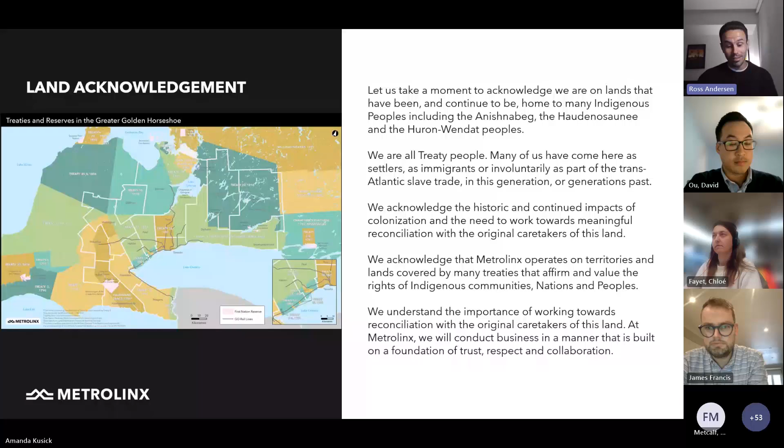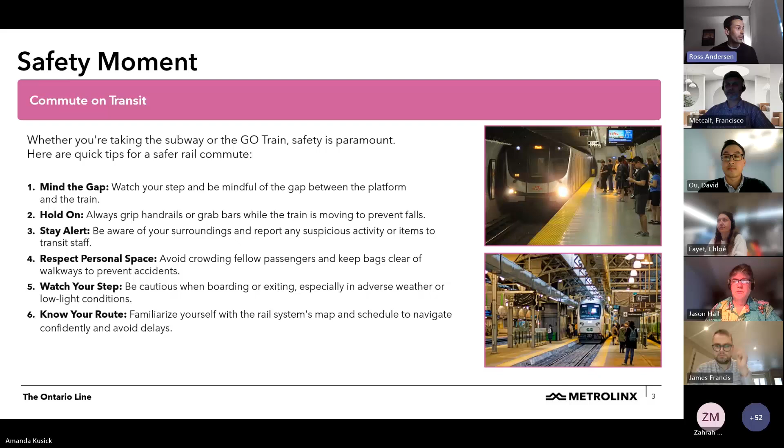Next slide, please. At Metrolinx, we like to give a safety moment ahead of our meetings, and today's safety moment is about transit safety. So if you're using transit, whether it's subway, streetcar, GO Rail or Via, just mind the gap and watch your step. Hold on and try to stay alert. Respect other people's space and know your route. Next slide, please.

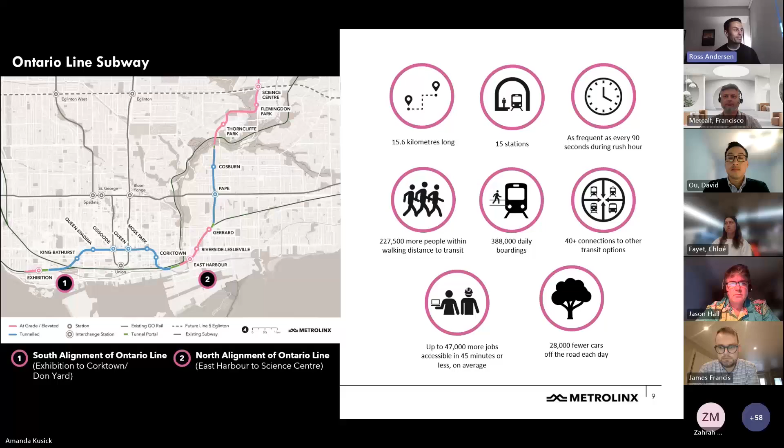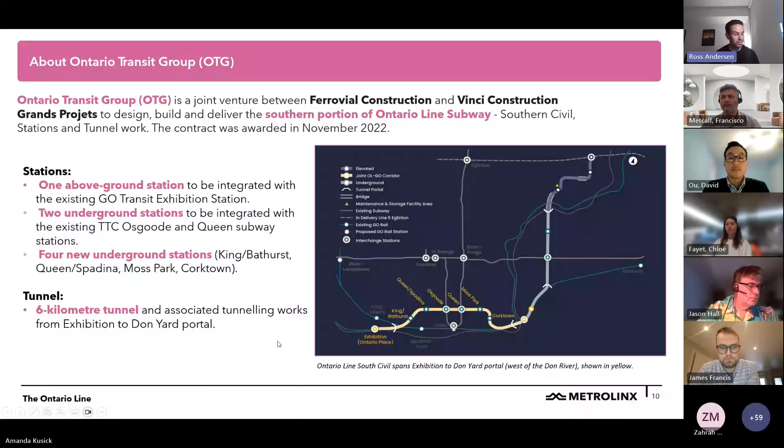So the Ontario Line is being delivered by several different contracts, and today we'll introduce you to the Ontario Transit Group. The Ontario Transit Group is delivering the south segment of the Ontario Line project. That is the tunnels and the stations. So as you can see here in the yellow highlighted portion, that will be what the Ontario Transit Group, otherwise known as OTG, will deliver. Two of those stations are very important interchange stations, which I just mentioned. And finally, they'll be building the tunnel as well. With that said, I'll hand it over to my colleagues at OTG and we'll go to the next slide. And David, perhaps I'll let you take the lead on this.

Corktown Station 2024 construction look-ahead schedule. So below on this list here are the major activities that will happen this year. So archaeological investigations. Archaeological work is complete on the north site. The south site is expected to be complete mid-spring 2024. The site hoarding installation is ongoing. The purpose is to define the long-term construction zone during the tunnel and station works. It will assist with public safety, noise mitigation, and site protection.

Piling operations are expected to start this spring and last throughout the summer. Once complete, excavation activities inside the shaft will start, and excavations are expected to reach a depth of approximately 30 meters below street level to reach the bottom of the station and tunnel. Next slide, please.

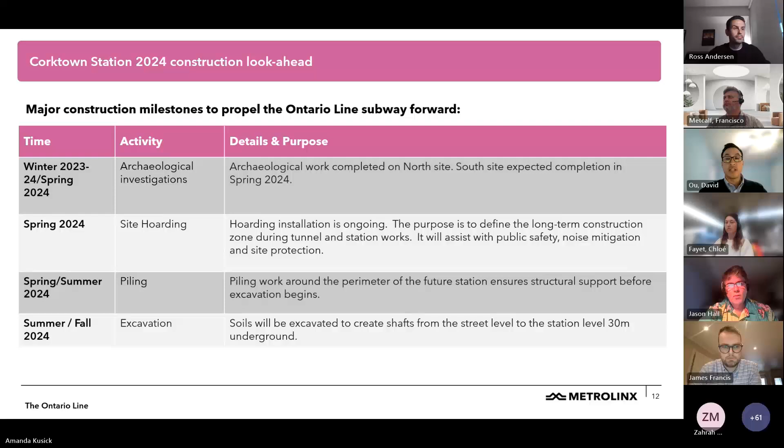This is a photo of our north site. Along the perimeter, you can see plywood, concrete blocks, and scaffolding. This serves as our hoarding system and separates the public from our construction work zone. It also acts as a noise and vibration barrier. Inside the site, you can see an excavator working. So what we're doing here is removing loose, disturbed material from the archaeological investigations, stockpiling it, and hauling it off site. After, we are replacing it with compacted granular fill; this will be the strong, stable foundation for the drill rigs to work on.

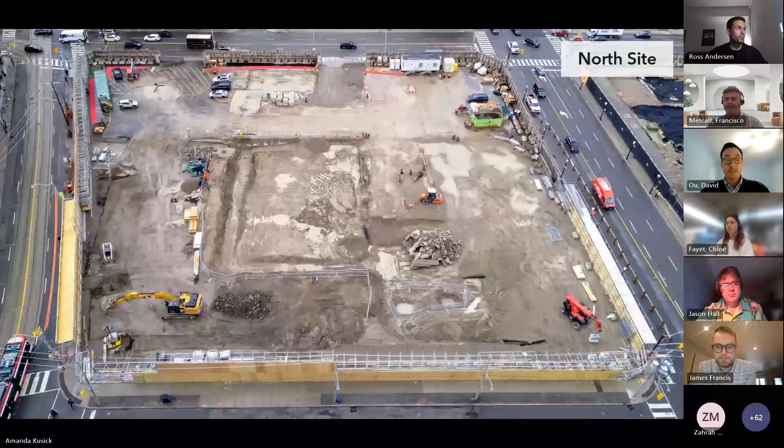Can you go back? So once the hoarding and site grading and preparation works are complete, we will then mobilize our drilling equipment to start the piling operation. Next slide. Focus on pile drilling.

How does piling work? Piling is a foundational technique used to construct underground structural support systems. Pile walls will be installed around the perimeter of the future station's footprint. It will ensure stability and support for the surrounding infrastructure and buildings during the construction of the station. A pile wall consists of overlapping piles to form an underground, watertight retaining wall. This retaining wall will go across the whole entire footprint of the station, and this allows us to excavate from street level all the way down to the bottom of the station safely while not disturbing surrounding infrastructure and buildings.

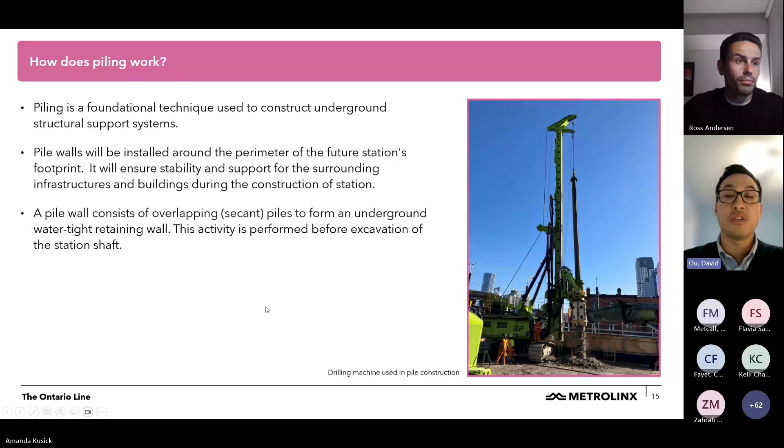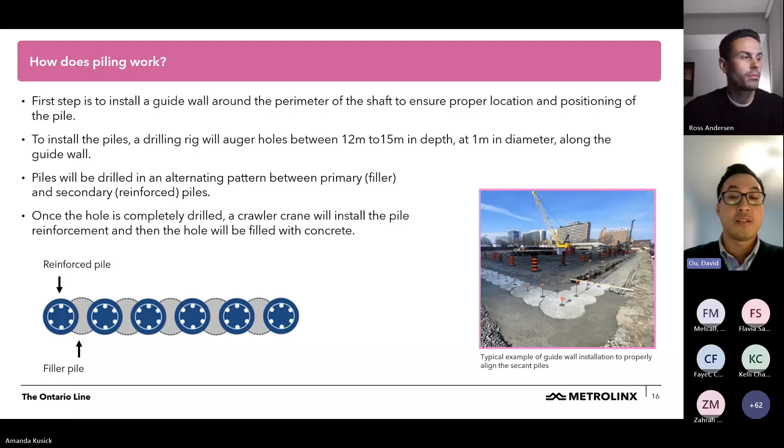of the pile. So to install the piles, the drill rig will auger holes 12 to 15 meters in depth to reach the bedrock. Once the holes are drilled, the hole is filled with concrete, and there are two main types of piles that we use. So the first type of pile is the primary pile in the photo below. That is just the hole filled with solid concrete. And then we have the secondary pile, which is reinforced. So these piles will be drilled in an alternating pattern between primary and secondary. Next slide.

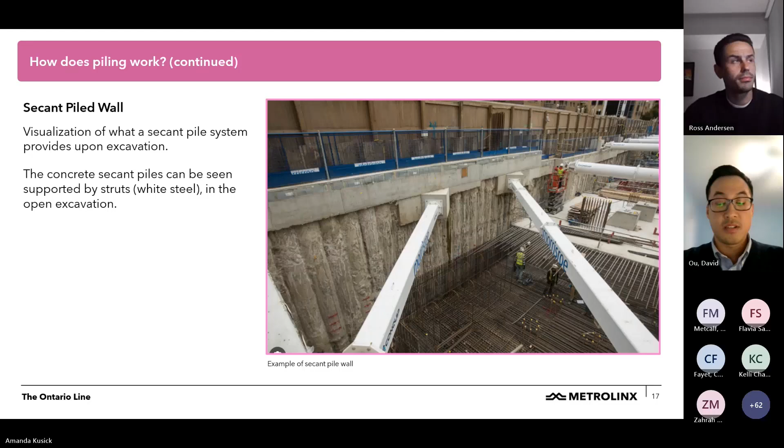So after all the piles are drilled throughout the site, we end up with a wall that looks like this. This is called a secant pile wall. So this temporary support wall allows us to safely excavate to the bottom of our station and tunnel, and allows us to build our concrete permanent structure from the ground back up. Next slide.

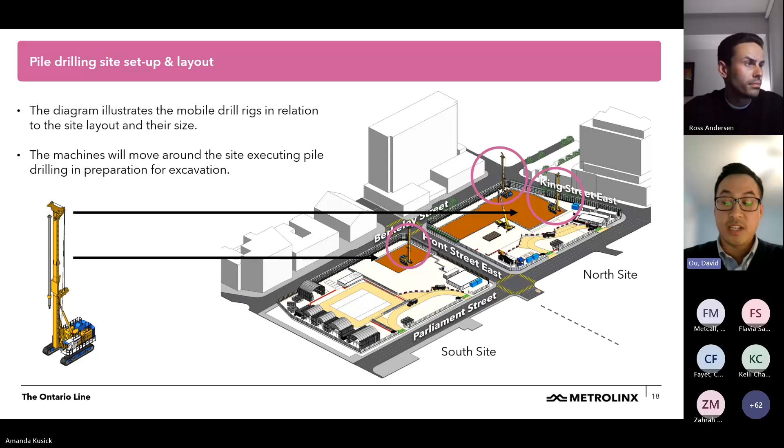So this diagram illustrates our drilling site, setup, and layout. So the piling operations will start on the north shaft first. Once complete, the drill rigs will be moved to the south, and then piling will start on the south.

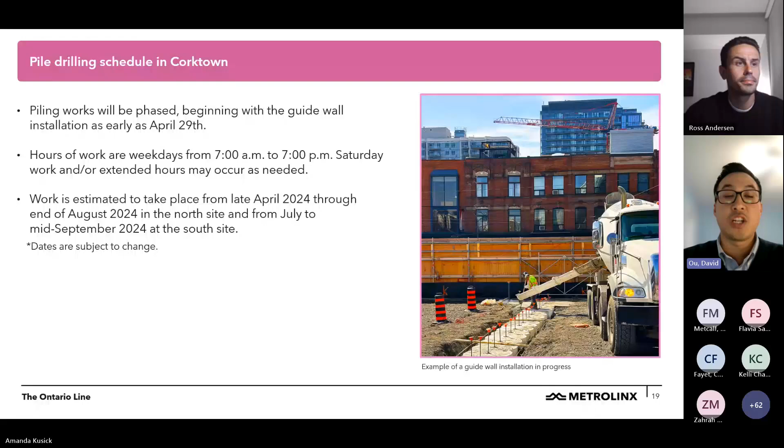So the piling drilling schedule in Corktown. Piling works will be phased, beginning with the guide wall installation as early as April 29th. Hours of work are weekdays from 7 a.m. to 7 p.m. Saturday work or extended hours may be required if necessary. The work is estimated to take place from late April 2024 throughout the summer into August in the north site. And for the south site, expected to start July and last throughout to mid-September.

I'm going to hand it over to my colleague, Chloe. She'll be talking about the impacts of the drilling and how we minimize all the impacts to the public and surrounding neighborhoods. Thank you. So during the execution of the piling activities, the community is to expect some noise from the equipment drilling the piles, loading excavated material, delivering material such as steel beams, and delivering concrete. So to be a little bit more precise, the equipment that will be used during this operation includes drilling rigs, cranes, excavators, concrete pumps, and also concrete trucks.

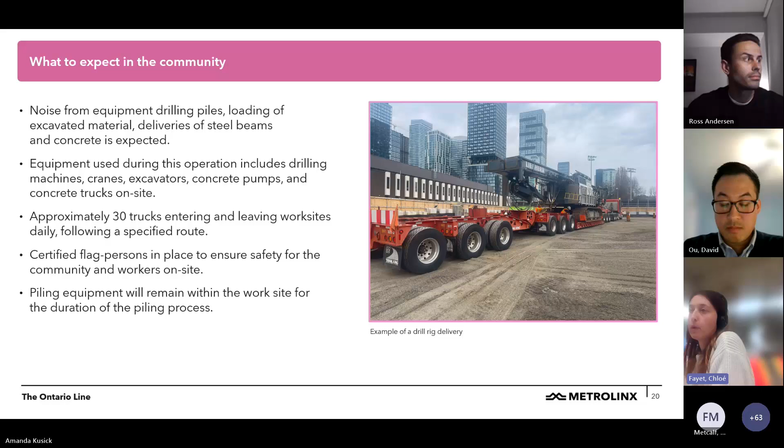So we are expecting approximately 30 trucks, more or less, entering and leaving the work sites on a daily basis, and those trucks will have to follow specified routes. Also, we will have certified flag persons in place to ensure the safety for the community and the workers on site. Finally, the piling equipment will remain within the work site for the duration of the piling process. So to the right, you can see an example of a drill rig being delivered on site on a truck. Next slide, please.

So now moving on to how we will reduce the impact to the community. So first of all, the trucking haul routes. So as I mentioned just before, the trucks have to follow specified routes. So coming from the east, the trucks will be coming from the Don Valley Parkway to Richmond Street, and then they will enter from Parliament Street and turn right into the site. The trucks will have a flag person to assist them to come on into the site.

Then for the trucks coming from the west, they will be coming from the Gardiner Expressway. Then they will go on Sherbourne Street and then turn on King Street and then turn again on Parliament Street to go inside the site with a right turn. Again, a flag person will be here to assist. The OTG delivery trucks are contractually instructed not to arrive on site before 7 a.m. to avoid any noise. So this was for the north part of the construction site. Regarding the south side, the routes are still being determined in collaboration with the City of Toronto. So this will be announced at a later date.

Now, regarding the pedestrian and traffic impacts. So all the sidewalks will remain open. The pedestrians will be able to continue to use Parliament Street. There will be flag persons to assist with the passage when the trucks are approaching the entrance and the exit points.

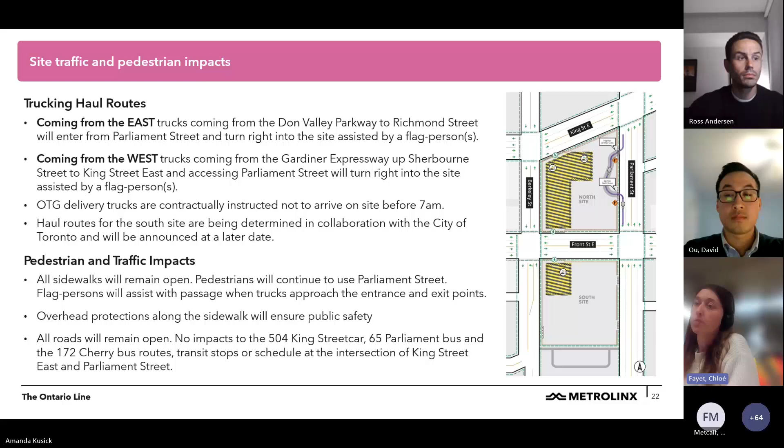Also, there are overhead protections that have been installed along the sidewalk that will ensure the safety of the public. And then finally, all the roads will remain open. So there will be no impact to the 504 King Streetcar, neither to the 65 Parliament bus or the 172 Cherry bus routes. So no impact on the transit stops or the schedule at the intersection of King Street East and Parliament Street. Next slide, please.

So to reduce the impacts to the residents and businesses in the area, mitigation will be in place. The daytime work hours for the current phase of work are 7 a.m. to 7 p.m. We have been installing 5-meter high noise wall along King Street East, Berkeley Street, and Front Street to help reduce the noise. We will use auger cleaner, which is a piece of equipment that we add to the drill rig in order to reduce the noise level when cleaning the rig. Also, by using continuous loop truck routes, we will be reducing the need for the truck to reverse and consequently to use their backup alarms, so less noise.

The air quality will be monitored to track dust, debris and vehicle emissions to ensure that the construction activities don't impact the quality of the environment. We have also dust control measures and street sweepers and wheel cleaning as needed to ensure soil and sediments are kept off the city streets and the sidewalks. So on the right on your screen, you can see an example of the 5-meter high noise wall that has been installed on King Street, and then below a picture of the auger cleaner, which is the yellow item on the picture. Next slide, please.

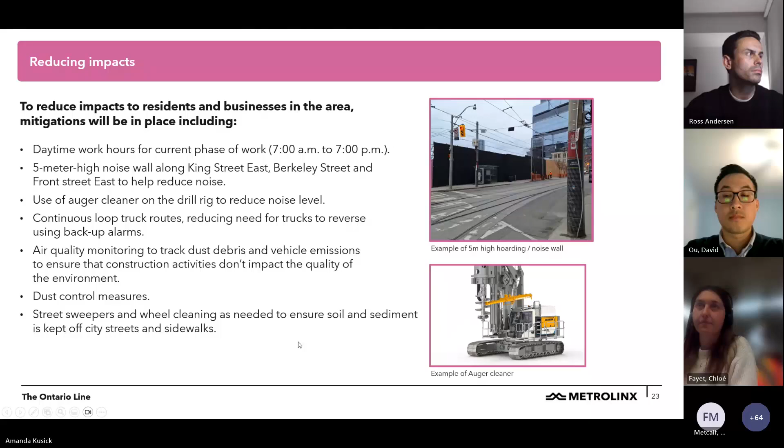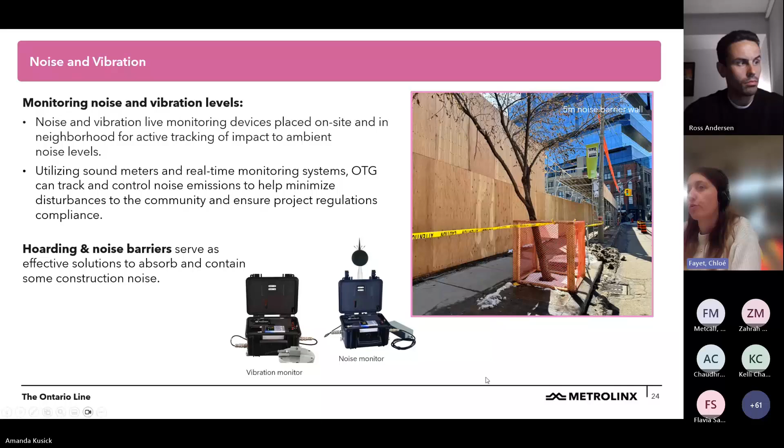So moving on to noise and vibration. So noise and vibration live monitoring devices are being placed on site and in the neighborhood for tracking of impact to ambient noise levels. Utilizing sound meters and real-time monitoring system, OTG can track and control noise emissions to help minimize disturbances to the community and ensure project regulations compliance. So at the bottom of the screen, you can see examples of vibration monitors and noise monitors. Finally, as mentioned before, we have hoarding that are acting as noise barrier. And they are an effective solution to absorb and contain some of the construction noise. Thank you.

All right. Thank you so much. Now, I know that was a lot of information at once, and I'm sure many of you have questions, and this will be the time to ask those questions. So, if you'd like to raise your hand, please do so, and I will call on folks who have their hands raised in order. I will go between those who have their hands raised here in the chat, and then I will go to the questions in Slido for those of you who have submitted questions ahead of the event tonight. I'm going to ask my colleagues as well to enable the chat function if you do have a question and you'd like to insert it in the chat, but I'd like to kindly remind folks to please be respectful in the chat.

Candace, I see your hand is up, and let's start with you. I'm going to enable your microphone right now. So, Candace, your microphone is enabled. Candace, do you have a question? Candace, please unmute your microphone by hovering over the microphone option on your computer, and it should say unmute. If you're still having trouble with it, we'll come back to you in just a moment. In the meantime, I'll go to Marion. Marion, I have allowed your microphone. Can you please ask your question? You have to unmute your microphone. Hi. Hi, we can hear you. Okay, great.

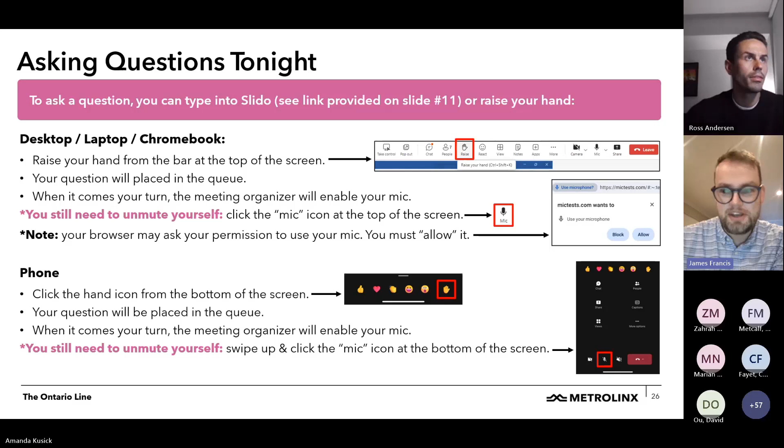It's nearly completed. We have a bit more archaeological work to do. And as soon as we're done that on the south site, and we have completed all of that work in accordance with regulatory requirements, we'll be ready to hand that over to OTG to proceed with construction.

So I recognize I gave a fairly long-winded answer there. You can probably tell I'm quite interested in the heritage elements here and archaeological elements, but that's why we've been proceeding a bit sooner on the north site. We were through our archaeological work a bit ahead of when we've been complete on the south site.

Jason, I see your hand is raised. Would you like to add something? Yeah, no, that's a perfect response. Just to add to that, by coincidence, the lion's share of the piling is in the north. So if we do get started on the north and then get started on the south shortly afterwards, then they could both be done basically at the same time. So it's a happy coincidence that it worked out that way. All right. Thank you both for that good answer.

I am going to go back to the chat, and I think I've got another one here for you, James. So the question is, do we know if there will be any new retail in and around the station, or will it just be a stop along the way? Also, is there any data on how this will affect surrounding property values? I'd like to add, we aren't real estate experts, and we can't give advice on property values, but we can certainly speak to the first aspect of your question.

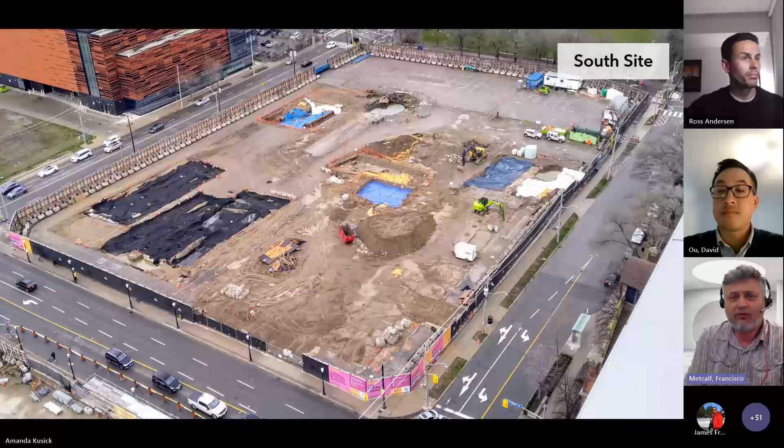Francisco, do you want to add to that? Yes, just to add to it, just a reminder, our monitoring stations are operational 24/7. So if something like that happens and it triggers an alarm, we will know immediately and we will take action accordingly.

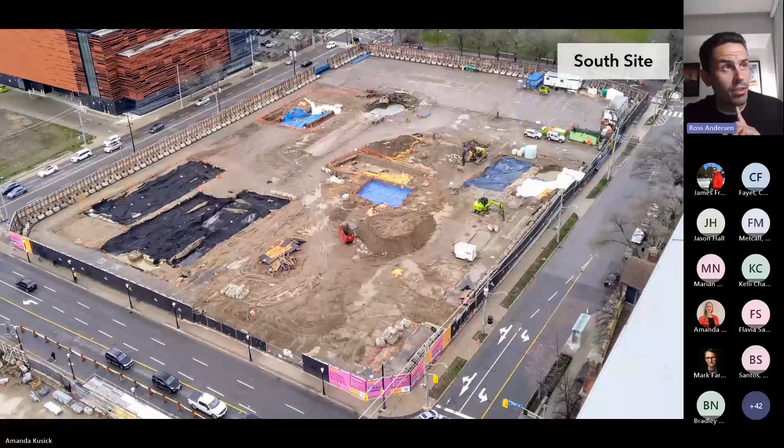Excellent. Thank you both. There's another question here, Marian. I believe we'd address this question. Perhaps it might have been missed, but the question here is, the whole line was expected to be finished in 2030. When is Corktown Station expected to be finished? James, can you provide Marian with a response to this question?

So Marian, overall project, we're looking forward to an opening day of 2031. In terms of the specific construction schedule for Corktown Station, I would actually ask OTG colleagues on the line if they have an earlier date than that in mind that may be being targeted. But overall, we are looking to integrate the work of this contractor, Ontario Transit Group, with the work of our contractors working a bit east of here in Riverside and Leslieville.

We have recently awarded and forthcoming contracts of work all the way up to Don Mills and Eglinton, and stitching all of that together, integrating that together for an opening day of 2031. So I expect that our civil construction here at Corktown will be ahead of 2031. In terms of how much farther ahead of 2031, that's perhaps to be seen, but everything will be stitched together for that 2031 opening date.

All right. Thank you so much for that, James. And recognizing it is 7:59 p.m., I'll ask Amanda to take us to the final slide of the presentation.